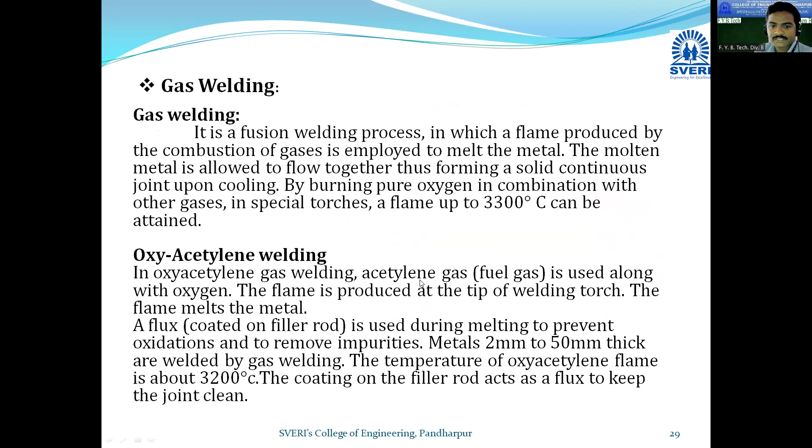Okay, now please pay attention, we'll start. In the previous lecture we covered the gas welding process where oxyacetylene gas welding we discussed in detail - advantages, disadvantages, all things are discussed now. Yes sir, only part remaining is there are different types of flames.

Write down: types of flames. So we know that whatever welding torch through which the flame is coming out, that flame is of different types. So we will discuss those types. One is neutral flame. Second is carburizing flame. And third type is oxidizing flame. So first will be neutral flame, second is carburizing flame, and third will be oxidizing flame.

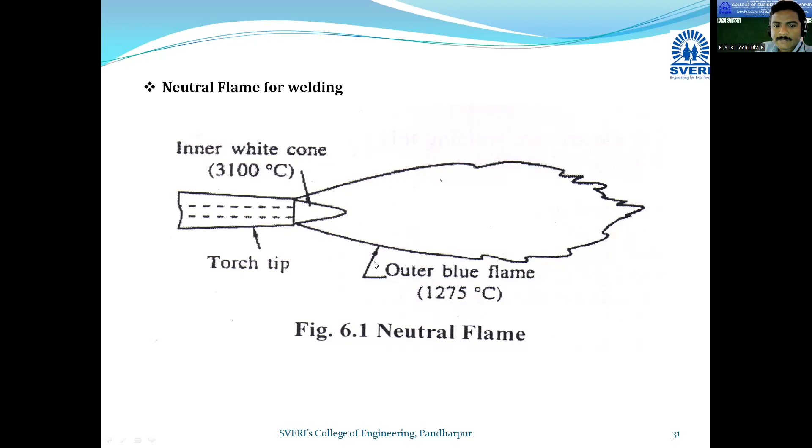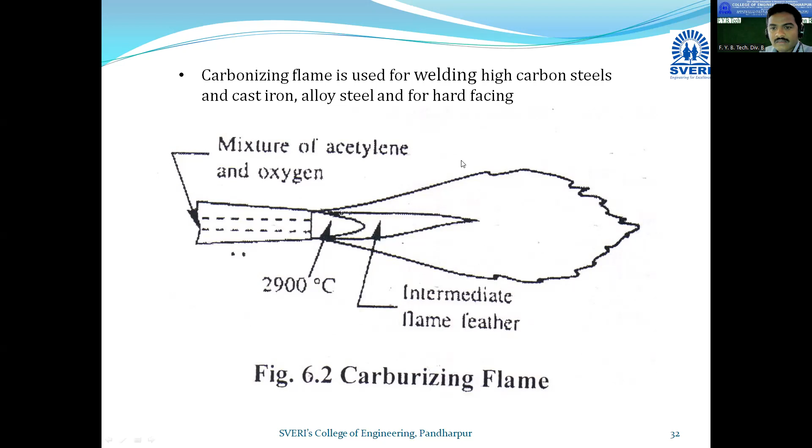Next type of flame is oxidizing flame.

In this oxidizing flame, the percentage of oxygen will be more as compared to acetylene gas. Whatever regulator you use to supply oxygen and acetylene, it will supply more amount of oxygen rather than acetylene gas. So in this flame you will find more amount of oxygen.

What is the temperature of this particular flame? It reaches around 3300 degrees Celsius, and this is used for joining non-ferrous alloys such as copper or zinc based alloys. If the material of the metal is copper or zinc kind of thing, we can use this oxidizing flame. So more amount of oxygen.

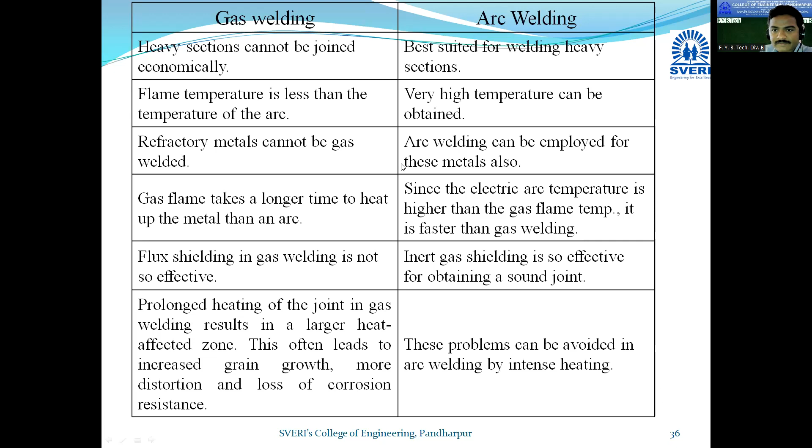Now the next part is soldering. Do the heading: soldering. Put the heading soldering.

Now what is soldering exactly? Everybody has seen the soldering process. Has anybody seen it anywhere? If you see in the shop of radios or the repairing shop of radio, tape or some kind of electronic devices, there are PCB boards, printed circuit boards, on which there are wires that we want to join to the PCB. So we prefer soldering, we join them, we call it tagni in Marathi. That is called the soldering process.

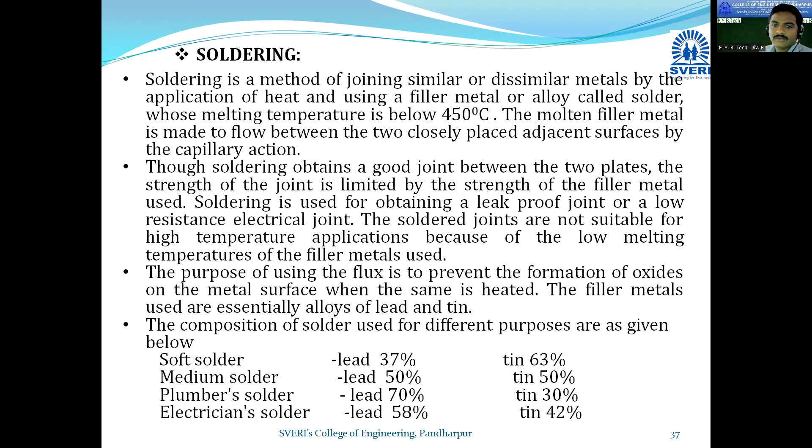If there's an electronic circuit, a PCB board, filler material is used with a soldering gun. Through this, current is flowing and we can carry out the heating, and here this filler material gets melted, and we can complete the joint, or complete the soldering.

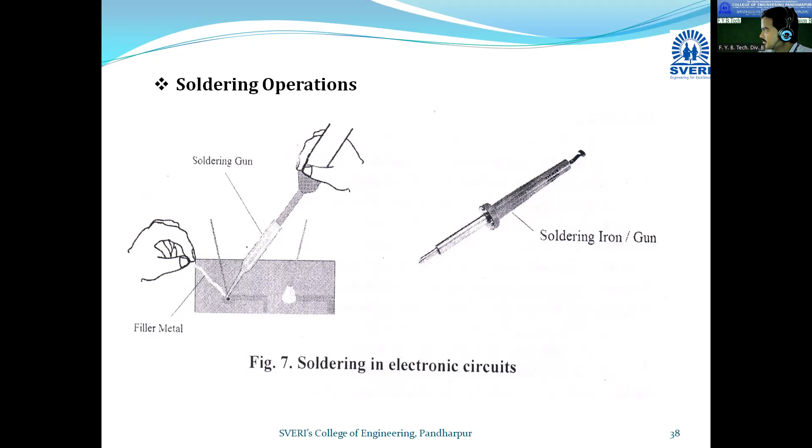Now how do we do this soldering process? There are certain steps that we should understand. For soldering, we have to follow some steps, the standard process.

Whatever two parts you want to join, those parts should be fitted very closely, so that the space between them is extremely small. If there's a bend on the plate, you should properly straighten it to remove the gap. That is one requirement.

Then second is clean the surface. There should not be any kind of dust or any particle over there. It should be perfectly clean.

Then next will be application of flux. We apply the flux for a reason, similar to arc welding, so that reactions don't occur and the joint gets a longer life. There should not be any reaction. It prevents the reaction with oxygen and nitrogen, so we have to apply the flux.

So this is the basic process of soldering that everyone has to follow for joining the parts.

Now I will do the diagram for drawing. One 2-dimensional diagram you have to draw.

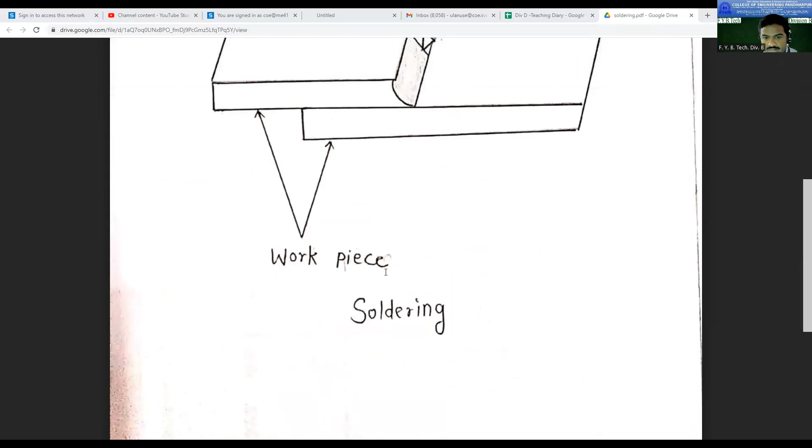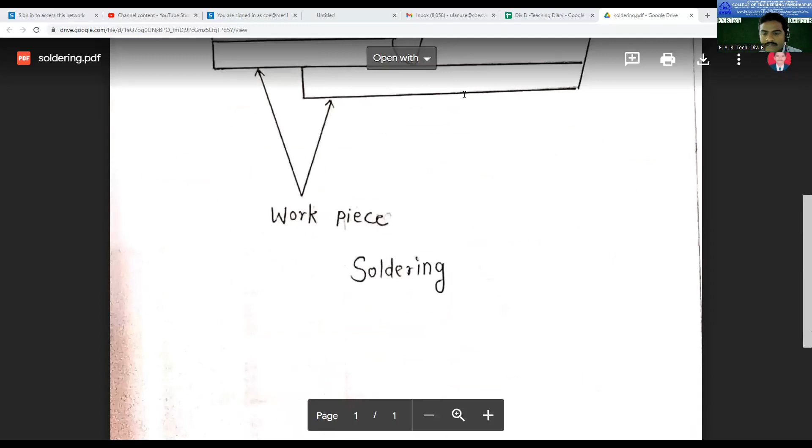Okay, for clarity of this, I will play the video, a YouTube video on this.

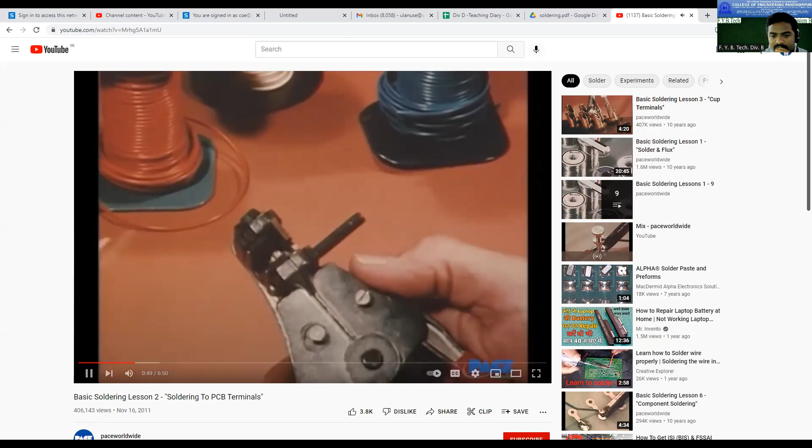Ones, they will first have to be stripped and tinned. Stripping can be done in several ways. One way is... can you see the video?

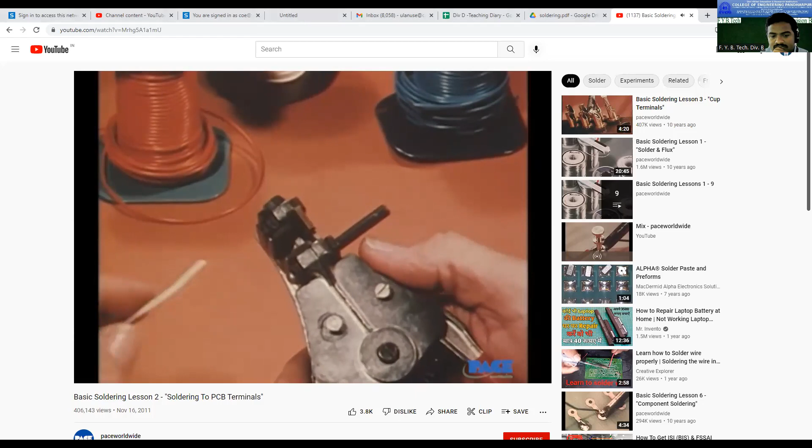With a mechanical stripper, this kind, if it's been properly calibrated to control the depth of the cut, can provide a clean strip and do it without nicking the wire. This type of stripper should not be used. The V-shaped notches in the blades do not conform to a round wire, and nicking the wire is the usual result.

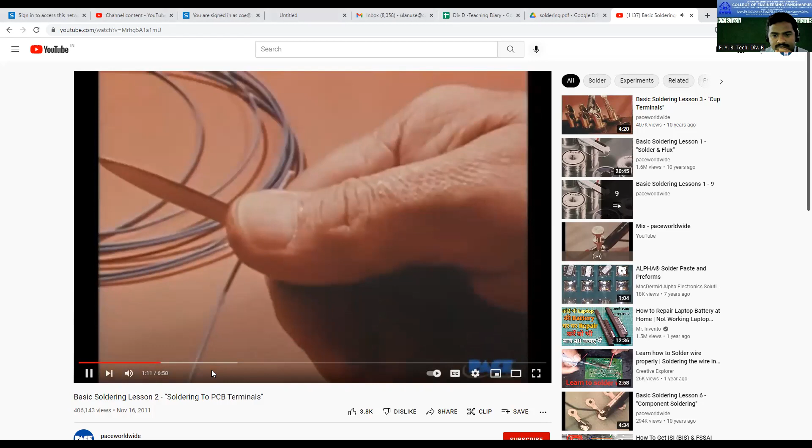Using a knife blade to cut the insulation is another unacceptable method—it's almost certain to damage the wire. A safer and more versatile tool is the thermal stripper, which has a pair of heated tips for melting or softening the insulation rather than cutting the PVC.

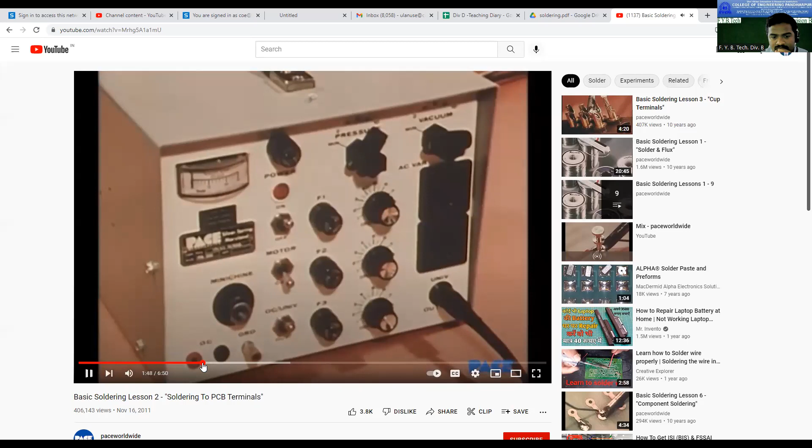The heating of the tips is controlled by a foot switch as penetration occurs. However, there is a thin film of oxide, and a wet sponge is used to wipe them off, leaving the surface clean under the insulation. Remember, when only one wire is placed in a terminal, there should always be an insulation gap left in the wire.

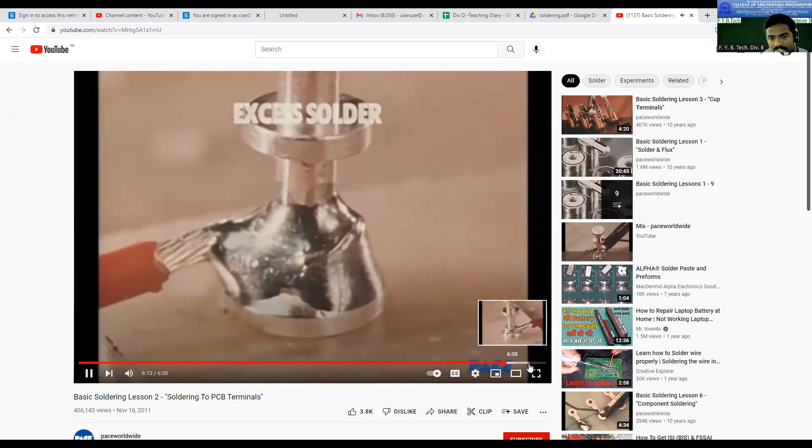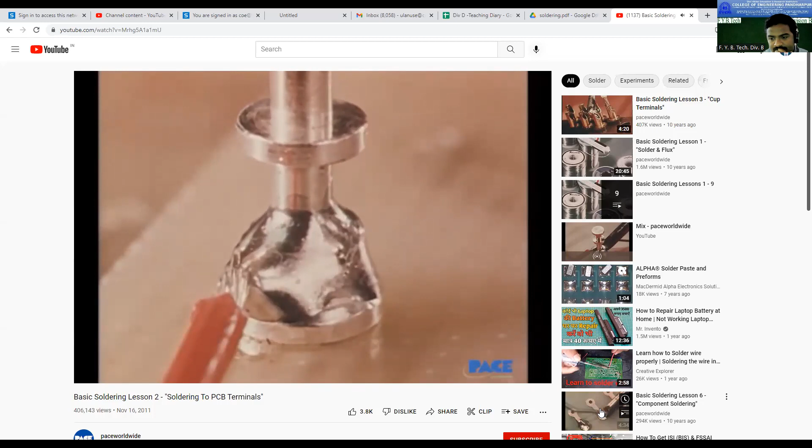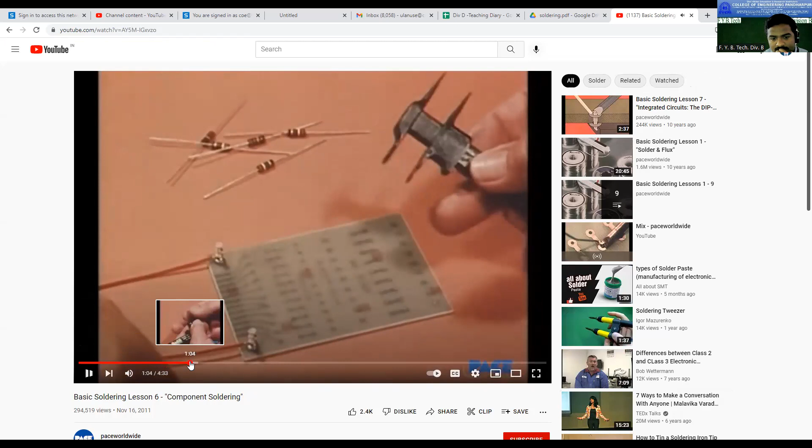Moving to a single-sided board, here the pads are also cleaned with the abrasive stick. Pliers will be used, adjusted to spacing. The leads are wiped with solvent to remove oil. For clinched lead termination, the leads are first semi-clinched, then cut to a length equal to the pad diameter.

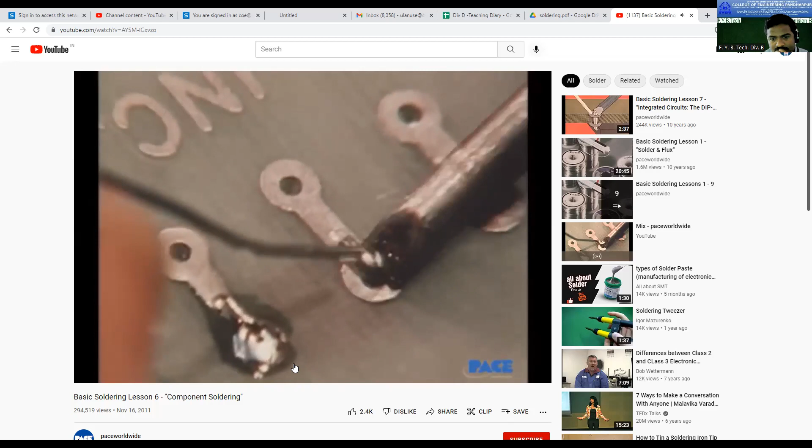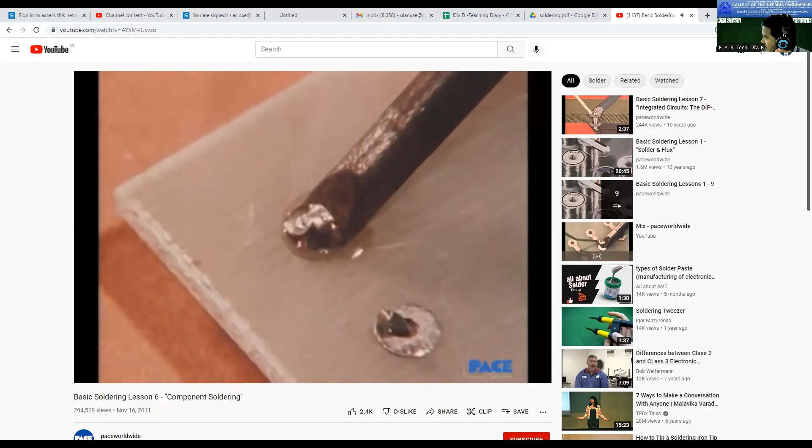The tip is brought in contact with the lead, since this is the principal thermal mass in the joint. It's done with a light touch, so that no pressure is applied to the pad. The solder is painted on, and then removed before the iron is removed.

To complete the soldering, the iron is always swept over the end of the lead, and once the joint is cleaned after soldering, the appearance of the surface should show concavity and a smooth, shiny surface.

Joints like these are unacceptable because there has been movement during soldering. A good way to inspect a joint is to roll it around under an overhead light. The movement directs the light onto every spot and will quickly reveal any pits or discontinuities on the surface.

Okay, such videos you can watch for a better understanding of the soldering process. Board, now...